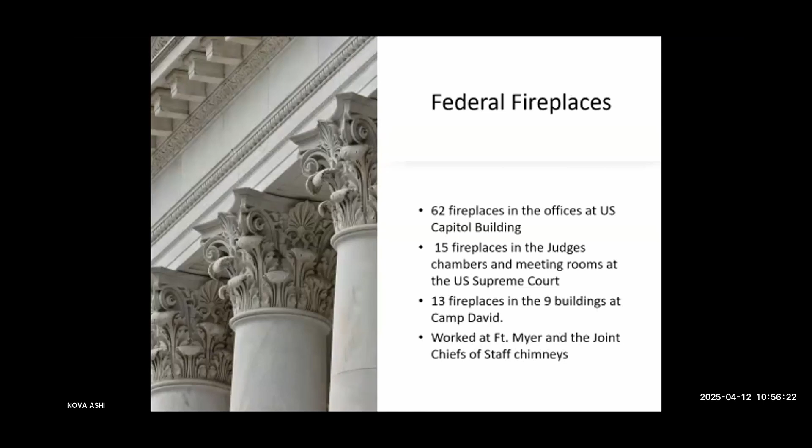So one of the things they wanted me to talk about is fire science. Fire is the rapid oxidation process or chemical reaction involving fuel, oxygen, and heat, known as the fire triangle. If you're from the fire service, you probably talk about the tetrahedron, but this is what I learned. The reaction releases heat and light, with flames being the most visible manifestation of combustion.

Fuel, any substance that can burn, like wood, gasoline, or paper. The oxidizing agent typically found in the air that reacts with the fuel. And then the energy required to raise the fuel to the ignition temperature, the point at which combustion starts.

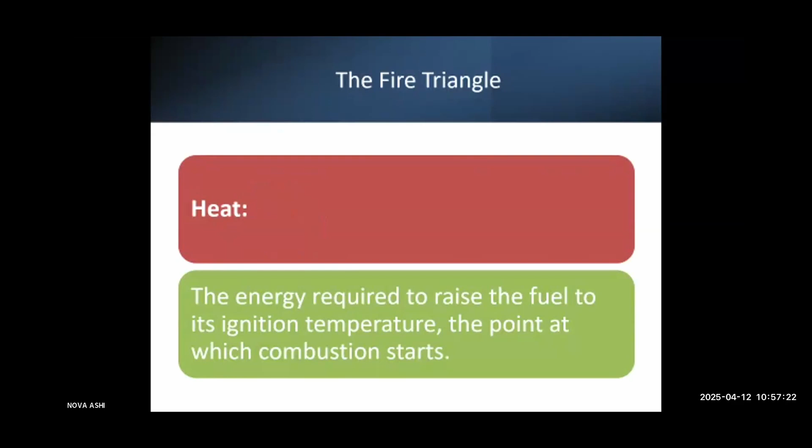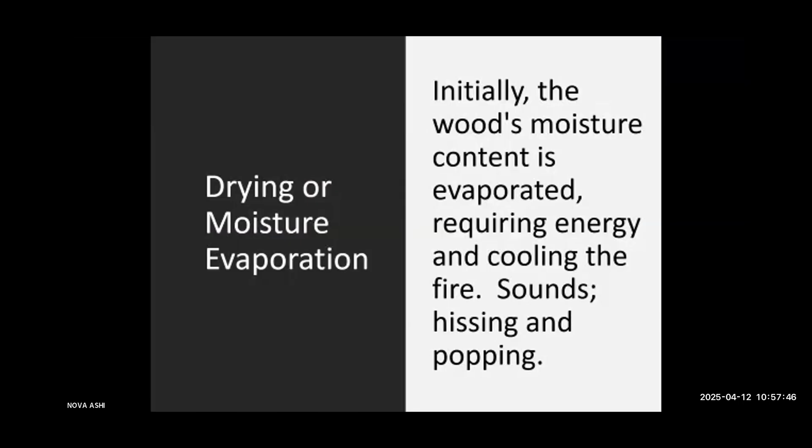Let's talk about the 3 stages of wood combustion as it really relates to the wood in someone's house. Drying or moisture evaporation is the first stage. Initially, the wood's moisture content is evaporated, requiring energy and cooling, and the sounds that you'll hear are hissing and popping. This could also be in your fireplace.

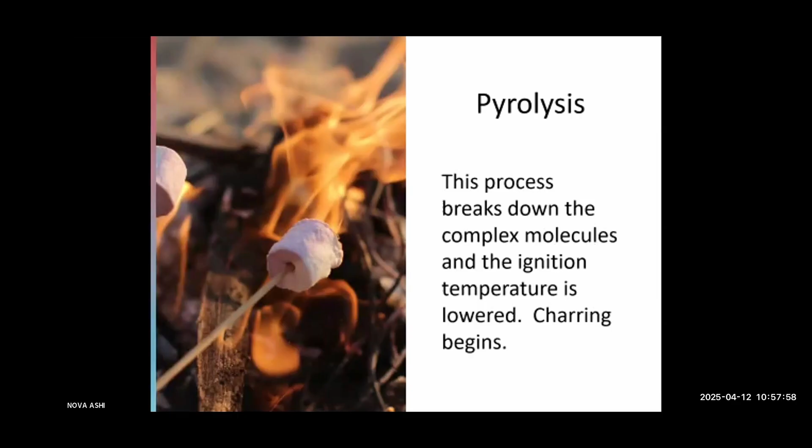Pyrolysis, that's the process that breaks down the complex molecules, and the ignition temperature of the wood is lowered. This is where charring begins. The typical ignition temperature of southern pine, which is what we use commonly in this market, is between 400 and 500 degrees Fahrenheit.

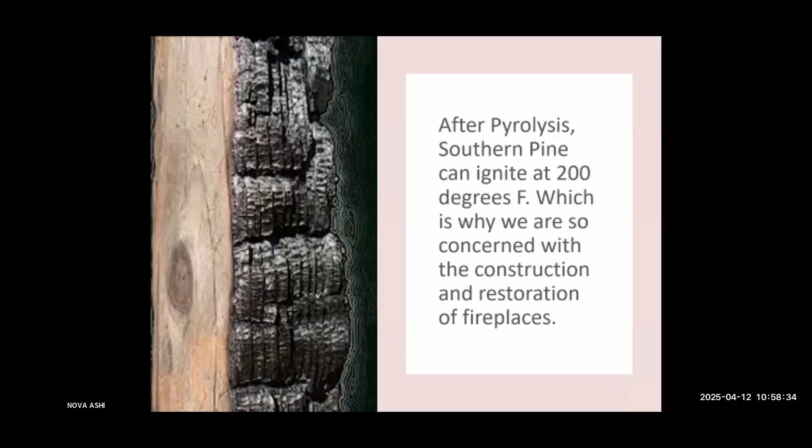After pyrolysis, southern pine can ignite at 200 degrees Fahrenheit. Back when I was a shave tail, they were telling us that it was 150 degrees, and that they had a study done at Warnock Hersey in a lab where they got southern pine to ignite at 150 degrees. That's what we always thought it was, and that's why we're so concerned about fire safety in people's homes as it relates to fireplaces and wood stoves. But I couldn't find that study, so it's gone. Maybe it's never true. All I found is 200 degrees when I looked.

Final stage of combustion, the wood has transformed into charcoal, and the gases are driven from the wood and burned first. Heat production begins here. Then the carbon in the charcoal is burned.

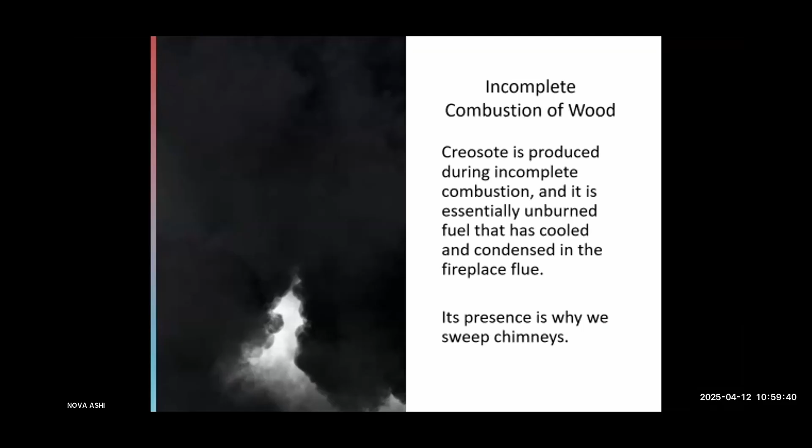Incomplete combustion of wood, creosote is produced during incomplete combustion. You got a wood stove, and you've got that wood stove dialed in, and you go outside and you look for the wood smoke, you don't see any. All you see is the heat signature because you're achieving complete combustion. If you're in an open fireplace, you can't control how much air is coming in and how much air is going out. So you're going to have incomplete combustion, and that's what produces creosote, and that's why we sweep chimneys to get the creosote out.

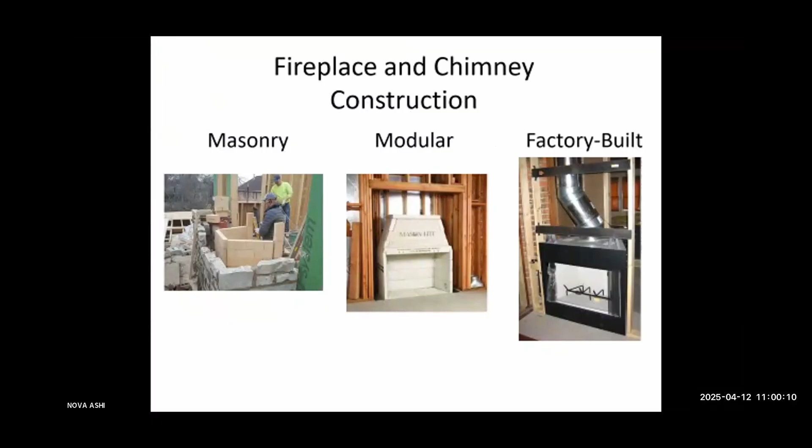Okay, fireplace and chimney construction. We'll talk about masonry, modular, and factory built. We'll just look at the picture. Guy's building a stone fireplace. He's building his firebox there with fire brick. And I don't like the way he's doing his corners. Any of you that are in masonry probably don't like the way he's doing his corners either. Everything should be tied together, but regardless.

Let's talk about the firebox. So the hearth thickness, that's the inner hearth inside the fireplace, and the outer hearth got to be 4 inches thick. Fire brick fireplace walls, 8 inches thick. If you want to use regular brick instead of fire brick, then it's got to be 10 inches thick.

The firebox is supposed to be 20 inches deep, although you see them all over the place, 16 inches deep, and sometimes in DC, like 12 or 13 inches deep. And you know, be careful when you see those, might not be real fireplaces, even though it looks like a fireplace.

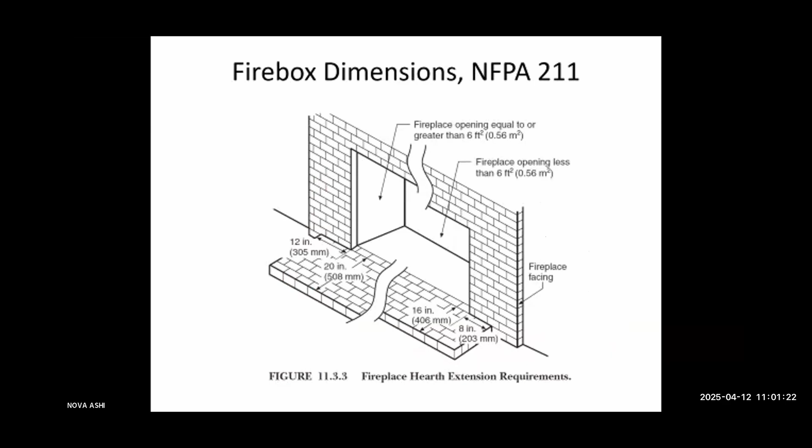If you have a firebox that is equal to or greater than 6 square feet, the outer hearth has to go out 20 inches in front and 12 inches on the sides. If you have a fireplace that is less than 6 square feet, then it's 16 inches in front and 8 inches on either side. That's in the NFPA 211.

Clearance to combustibles: where the trim sticks out on the top part of the fireplace more than 1.5 inches, you've got to be 12 inches above the fireplace before you install any trim. If it's less than 1.5 inches, then it's 6 inches from the top. It's always 6 inches on the sides.

Smoke chamber: total thickness of the front, back, and side wall shall be 8 inches thick, unless you're using fire brick, then it's 6 inches, or unless you're going 6 inches thick with masonry and then 5/8 inch with refractory cement. And then it's got to be parged smooth. One of the great things about parging it smooth: it looks better, protects, and smoke can get up faster.

What is the number one cause of creosote? Residence time. What is causing a lot of problems with us fireplace guys is they are sealing up the houses tighter. People are doing energy audits. Houses are tight, not getting enough air. If it's not getting enough air in, it's just chimney physics. You don't get the air out, and you get more creosote.

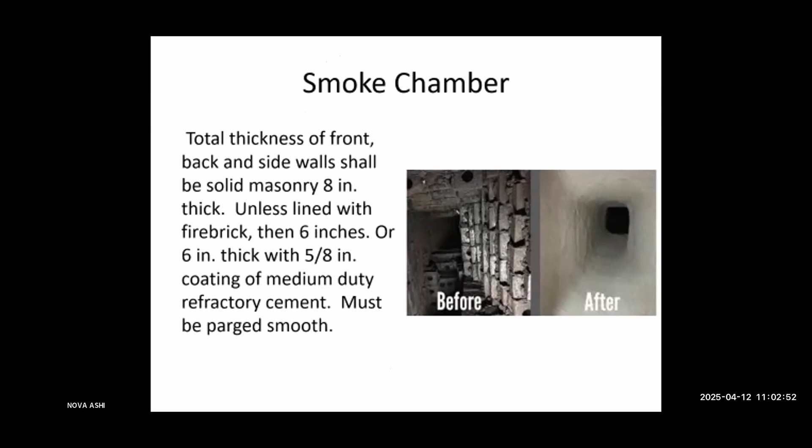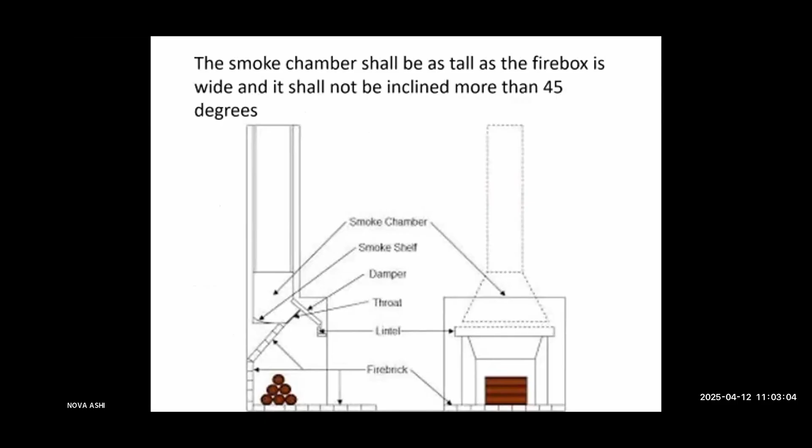The smoke chamber shall be as tall as the firebox is wide, and it shall not incline more than 45 degrees. Masonry chimneys shall be lined. Clay flue lining's got to meet ASTM C315.

Stainless steel's got to meet UL 1777. Then there are other approved methods: cast in place, heat shield when you've got a sleeve inside. Those have to meet corrosion resistance, erosion resistance, temperatures of 1800 degrees - really 1100 degrees intermittent, 1800 degrees once.

Terracotta clay flue tiles are the most common lining system for masonry fireplaces. They must not slope greater than 30 degrees when you're installing them, and they've got to have a mortar joint with refractory cement meeting ASTM C199.

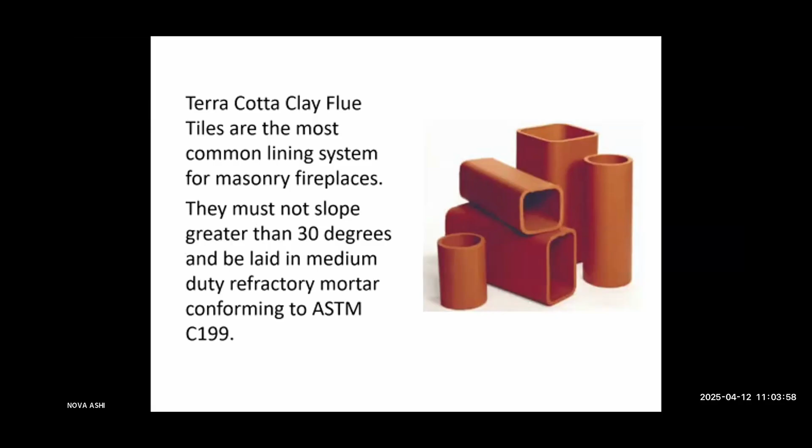If you're going to reline with stainless steel and take the old liners out - which is really the best idea for a fireplace, because you've got to get a big enough liner in - then you're going to install it and use poured insulation around it, following the manufacturer's installation instructions.

In this market, best practice is you don't have to insulate when you're relining a gas furnace, because we're not that cold. You go up north, yes, all the time you have to do it. Is it better to do it every time? Of course. But do we have to do it? No. And guess what, a lot of people don't do it.

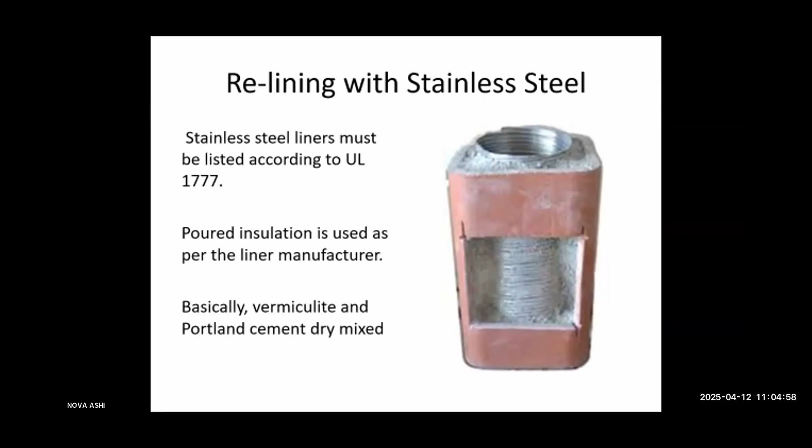Some people say, well, what is that insulation? It's basically vermiculite and Portland cement, dry mixed, in a bag. You pour it into a mixing pan, mix it with water, and then pour that around the liner. And that's what it looks like.

A lot of pre-insulated liners are now in use, and it makes it a lot easier when you're doing wood stoves and some furnaces, if there's enough room.

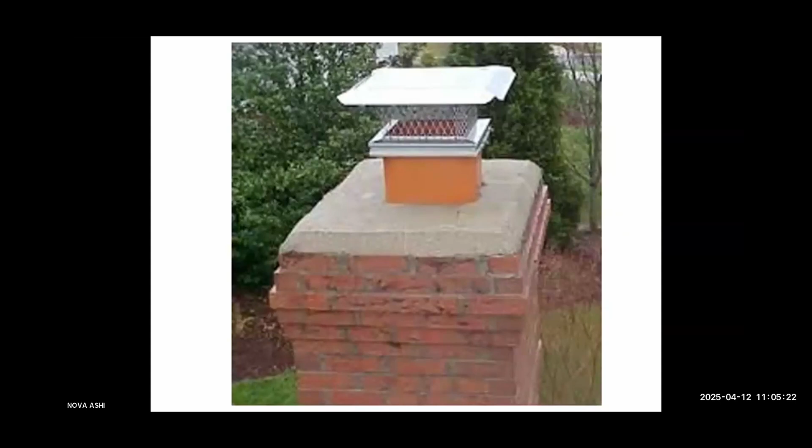Termination of a standard masonry fireplace in the Washington D.C. market. You guys have seen thousands of them from the ground. Usually you're not going up top.

Mason Lite fireplace is a modular fireplace, made out of masonry products. Isokern talks about theirs having Icelandic pumice in it, but it's a lighter weight concrete modular system.

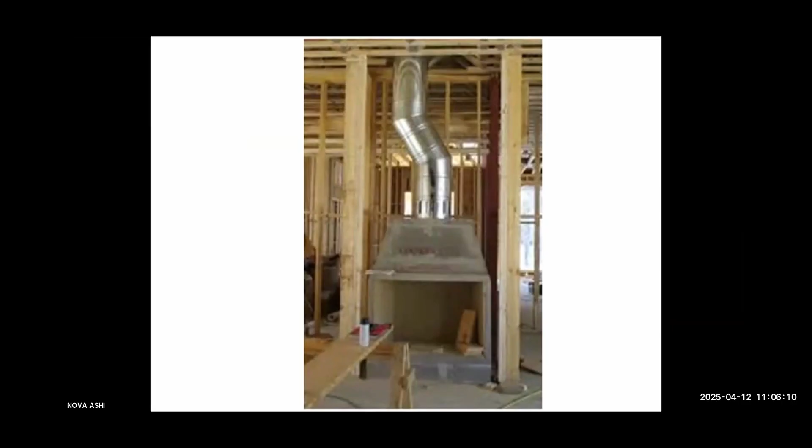I've seen them going straight up with their modular flues, and they all fit together. Most of the time, we attach factory-built fireplace chimney pipes to them. That's going to be air-cooled. For a fireplace that size, the math is pretty simple: it's a 10-to-1 ratio when it's square, 12-to-1 ratio when it's round, but usually they're 12 inches in diameter for something that size.

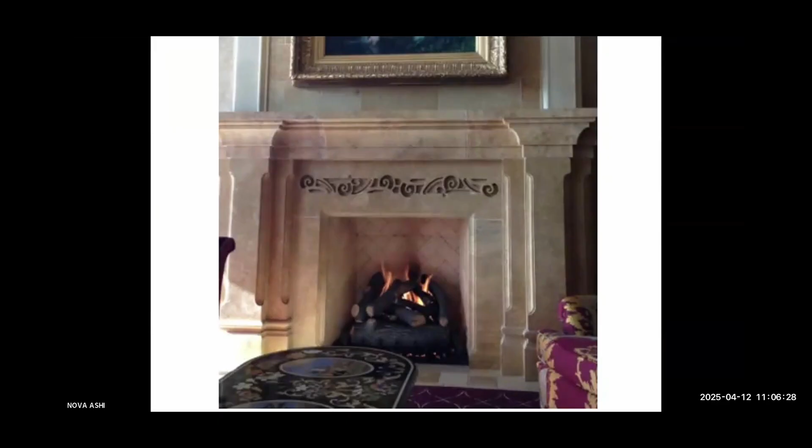You can do all kinds of different things on the interior. Here's the interior of the firebox looking like that. Here's a really badass, high-end fireplace with a beautiful herringbone pattern, gorgeous, and then you've got some old style look there.

Here's a commercial application, but it terminates at the top just like a factory-built fireplace would terminate, because it is a factory-built chimney that we're using. Factory-built fireplaces shall be listed, labeled, and installed in accordance with UL 127, and installed per the manufacturer's installation instructions.

Fairfax County came out a while ago, and the code said 1.5 inches, and they said, well, we want 2 inches. So the Virginia code says that, even though the manufacturer's instructions say 1.5 inches, Fairfax County wanted 2 inches. Well, guess what, we install them at 2 inches. Can't get them passed otherwise.

So let's look back here. This is a smooth face, so it's ready to have your tile installed, your lick-it-and-stick-it stone, whatever. Smooth face units are newer. People like those better because you get a better look of a real masonry fireplace.

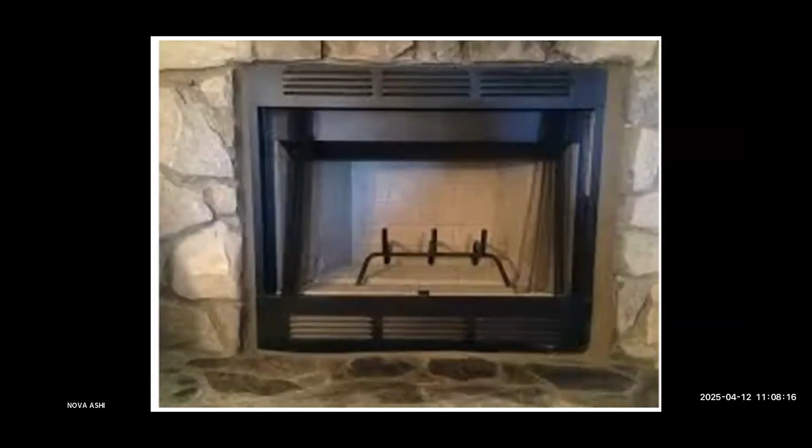But you cannot cover up those louvers. They shall not be covered.

Another high-end fireplace before the venting's installed. Another high-end unit - the interior of that brand looks better than some of the others. And then that's just a standard factory-built unit there. When you roll up on these, you're like, wow, that looks like a masonry fireplace. Then you go in tight and look and say, oh, those are refractory panels.

So, air insulated factory built chimney pipe. It's got a rating of up to 1700 degrees. It's got a galvanized outer piece, usually 12 inches in diameter, and then it's usually 8 inches on the stainless steel inner piece, air cooled.

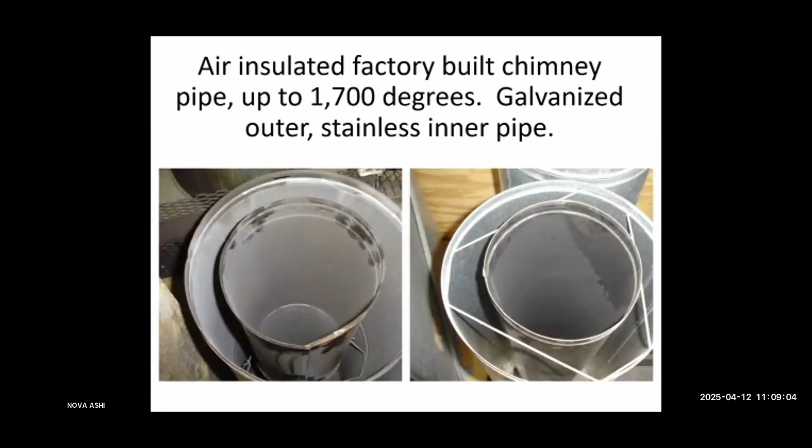Here's what it looks like installed. So we were just taking an old chase cover off that was leaking, putting a new chase cover on, and then we have a look down inside. Want to make sure there's no construction debris on top, make sure there's clearance to combustibles, make sure everything's secured as it should be.

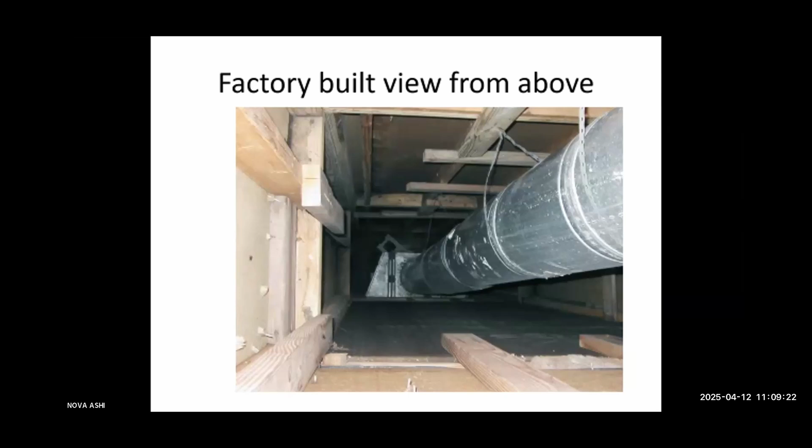And that's the way that it's terminated. You're going to get fooled, though, because sometimes you go into some really upscale neighborhoods where they built brick houses, and they put factory built chimneys on the inside. So you're like, oh, is that a masonry chimney? No, it's not. But they've cheaped out with the fireplace, even though they did the entire house in brick.

Just putting a system together here. You've got a brand new chase cover, and it has a collar. Then you've got a storm collar, and then he's putting the cap back on the air-cooled chimney.

You also have high-end units, so if we're trying to identify some things - you're walking in the house and it's like, what the hell is that? Is that a built-in wood stove? Well, that's essentially what it is. You guys have probably seen them.

We love to install those because the homeowners adore them. People that like wood stoves but have a factory built unit can tear the factory built unit out and invest some money into a high-end zero clearance unit - that's basically a wood stove installed into a stud wall system.

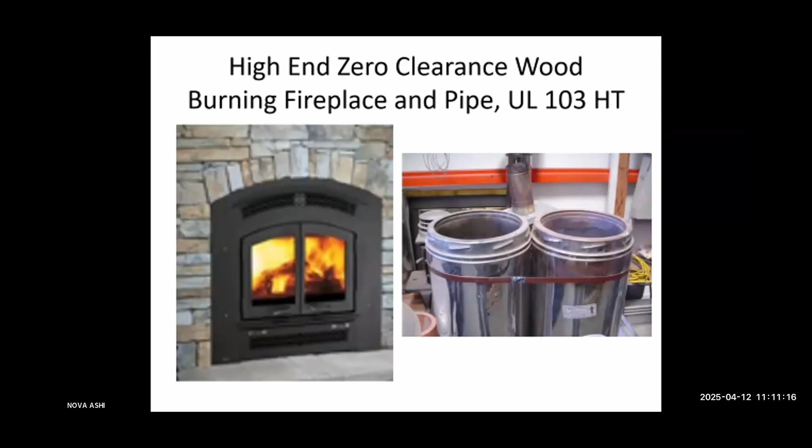So here's the installation. You've got non-combustible studs that must be installed at the top of these things because of the heat. We usually just go ahead and put them all around since we already had to buy them - let's just install those all the way around because those units get super hot.

Now, if you notice on top, it's got 3 holes, and it also has holes down below. The middle hole, that's for the venting. The other holes are for gravity-fed heat to go up into another room or a room upstairs. On some of these units, you can install fans to actually pull the air into the other rooms. You're looking at about 20 grand for an install, but it is badass and it's just wonderful heat.

So those were the wood burning units. There are many other wood burning units and even more gas ones. We don't have time to get into them all today. Most units will take gas log sets - the older ones, not so much, but most all new systems do, though not everything. So check the manufacturer's installation instructions.

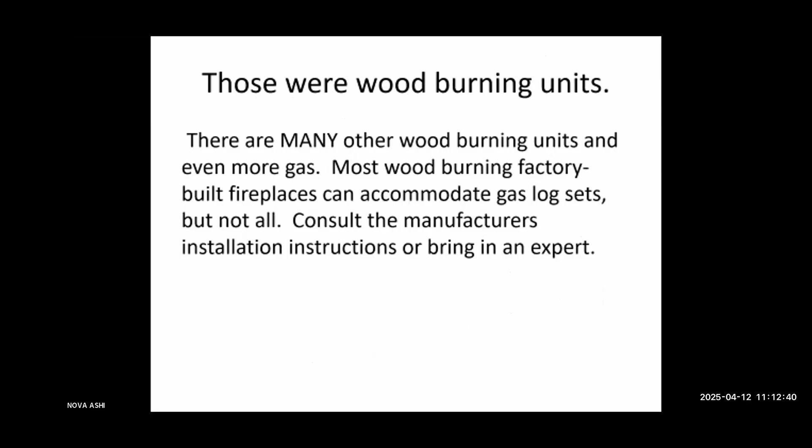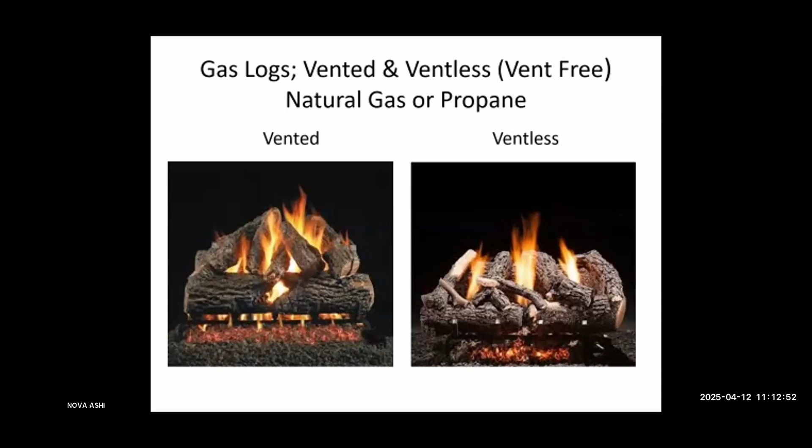That is the most realistic picture of what vent-free really looks like. They've gotten way better, but they're not going to be big flames.

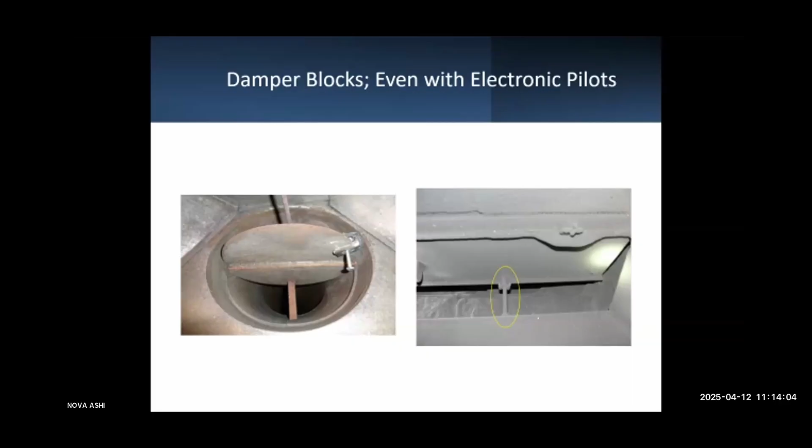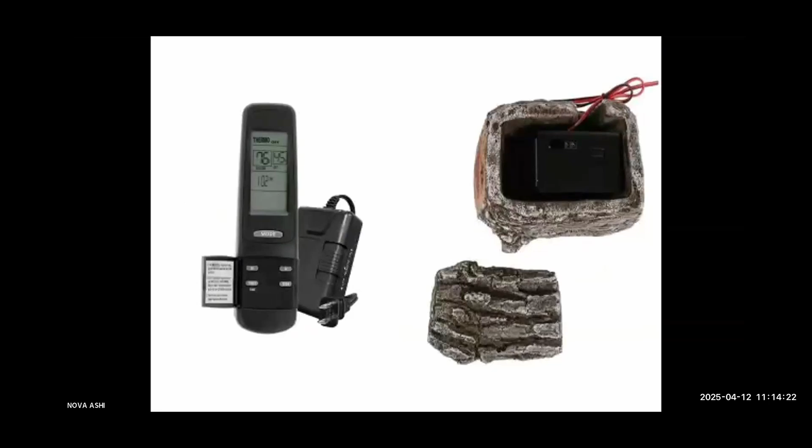The new gas log sets are all coming with remote controls because, hey, the guys like remote controls. Click, click, click up with the flame, click, click, click down with the flame. And if we're going to have those, then we need a receiver that goes into the firebox. That's the thing on your right-hand side here. Come on, let me see that right there. Now, those are going to melt unless you protect them. So as an installer, we put them inside the little fake log sets.

I think it's a great way of teaching kids not to touch hot things. You should have seen what we did with the wood stove in my house when I was teaching my son. He was screaming and crying, but I got his hand within a couple inches, and his mom was trying to pull away from me. But that kid never touched that wood stove after that. You figured out it was hot.

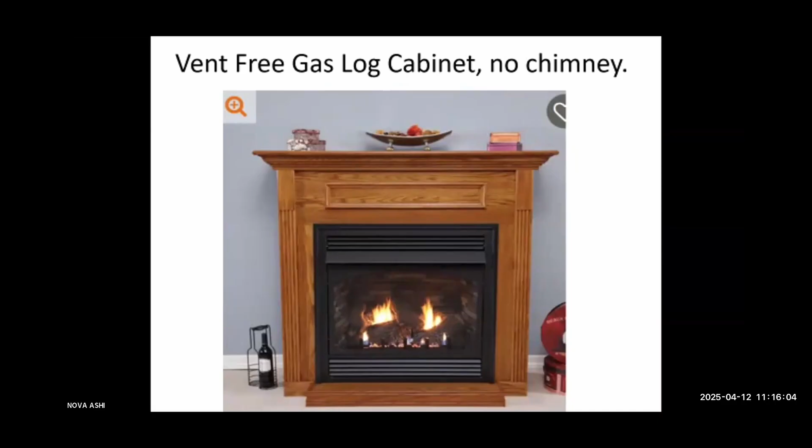So vented gas logs vent up the chimney and out into the atmosphere. Vent-free logs vent directly into the room. Well, it's a good thing because you do get more heat that way, that's for sure. But both can be installed into masonry or factory-built fireplaces. Both can be natural or propane gas, but vent-free has a very unpleasant odor.

We, as a company, will not install vent-free into someone's home unless we're replacing a vent-free system. And even then we're like, these things stink. I know, we've got one already. My wife loves it. Fine, we'll do it. But we put them in and it has been in writing that these produce a bad smell, and all of a sudden the wife says, I don't like that. Well, you signed the paper that you liked it. Everything was fine. And then we got to take it out. And that's what you do.

So it's got an unpleasant odor, and then you've got to meet the air volume rules. It's going to be in the manufacturer's installation instructions, and you need to do your calculations. Best way to tell the type of unit is to look at the tag, it's attached to it in the back, at least it should be. And that one doesn't say anything about it being ventless. So if it doesn't say ventless, it must be vented.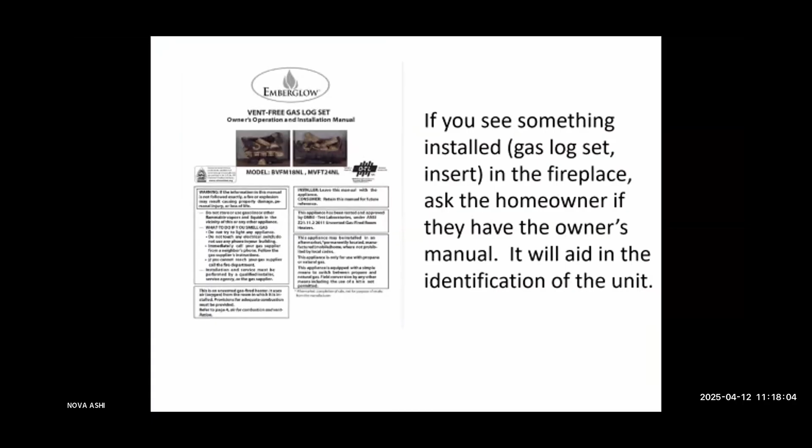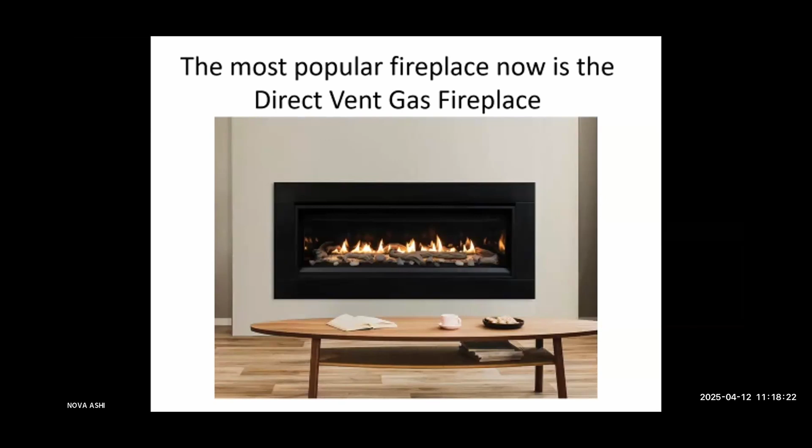Standard looking unit in my house. How does it work? You've got a pipe - the venting is a pipe within a pipe. Outer pipe is 8 inches in diameter, inside approximately 5 inches. This is a top venting kit that goes out. So air comes in around the 5-inch pipe, goes down, aids in combustion. Then exhaust goes up inside the 5-inch pipe and out.

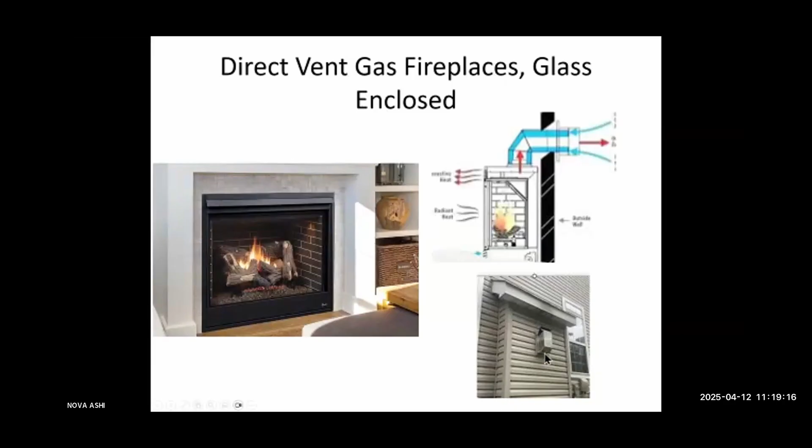If you look at the picture down here, we call that a doghouse. It's got a side venting termination cap. And here's what the pipe looks like, and there's a cap.

This unit is an insert, meaning it's inserted - the gas insert is inserted into a masonry code-compliant system. So you've got a wood burning fireplace downstairs, you replaced all your windows, and now your fireplace doesn't draw anymore and smokes back into the house. But that's kind of your room down there, and you want some heat. Best thing to do is put a gas insert down there, and the venting is slightly different - it's called coaxial venting, a pipe within a pipe, collinear. You can put a gas insert right inside, hook it up, run it up to the top of the masonry chimney, and you're good to go.

These are not to be installed inside of factory built units. And here's what the pieces look like for the insert.

Can you define code compliance? Look in the NFPA 211, that's where all the codes are. It's supposed to be code compliant, meaning it's not supposed to have any breaches or voids.

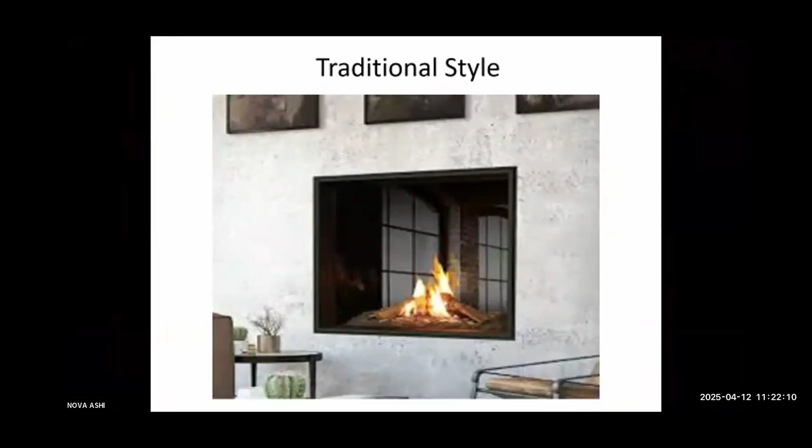But that's what that looks like. Here's another fireplace - another direct vent, traditional style. So you can't reach in, it's all covered with glass, can't touch anything. Direct vent gas fireplaces are designed to bring air in from the outside, not the home, and are sealed with a piece of glass in front or on all sides, which allows the system to meet today's energy requirements. If you're a builder, you want the Energy Star rating - you can't get that with open fireplaces. If you're building spec homes, you're not going to do that.

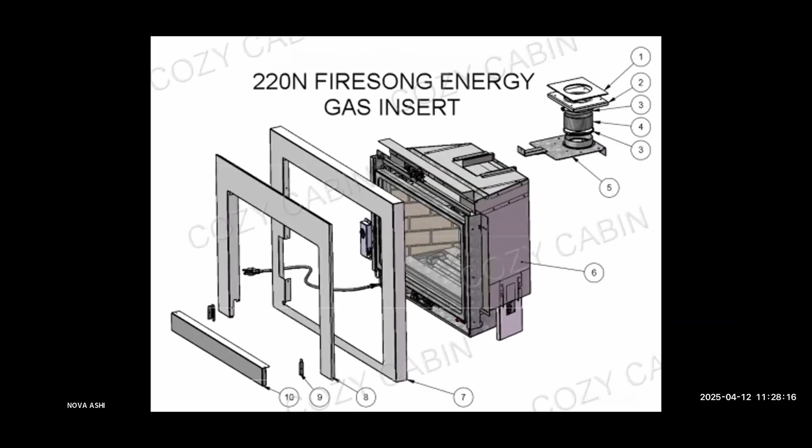This is what it looks like. It's a box within a box, just like a factory-built fireplace is a box within a box. This has panels inside, and instead of being empty with a grate, it has a grate for logs. A lot of these units have blowers, so you need to plug it in. Then you've got a surround and a trim piece. This is what they look like.

One thing you'll notice when looking at a unit like this is you might ask, is that a direct vent gas fireplace? Well, yes, but is it an insert? If you check around the house and see a chimney, it's probably venting there. The other thing to look at is the outer hearth—if there's an outer hearth, that's probably a gas insert. If it's a wood floor, it's probably a direct vent gas fireplace, because direct vent gas fireplaces don't need hearths.

When you come into someone's house and don't know what it is, just ask for the owner's manual, or look underneath and sometimes find information on a tag down there. Also remember, with these factory-built fireplaces, direct vent gas fireplaces, if you're poking around and want to take that glass off, be super careful. That glass is the single most expensive part of the entire gas fireplace—between $650 and $700 for a piece of that glass.

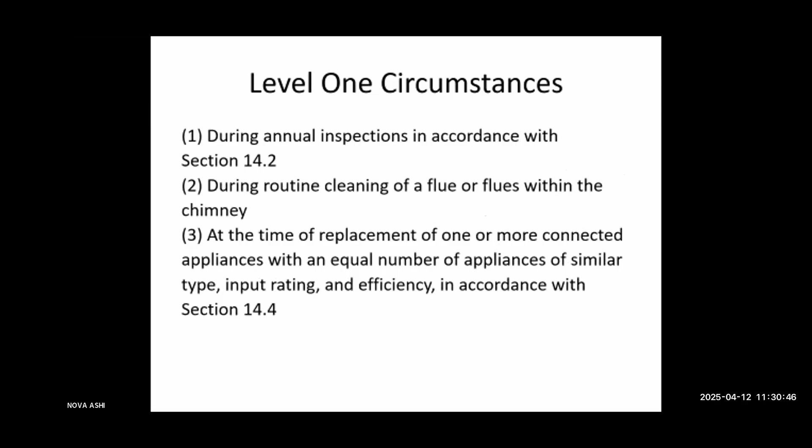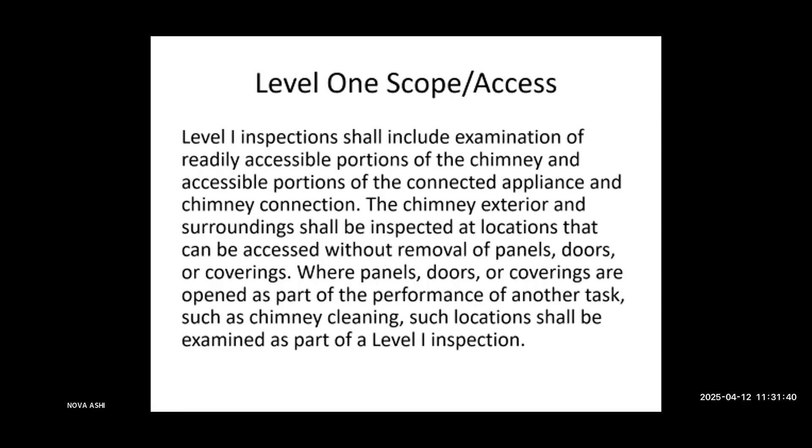Where there are panels, doors, or coverings that are opened as part of performing another task, such as the chimney cleaning, those locations can be examined as part of a level 1. Readily accessible areas of the chimney flue that can be observed through existing openings—like a thimble, clean out, or flue termination at the top—shall be examined for the presence of a continuous flue, proper installation, and no damage.

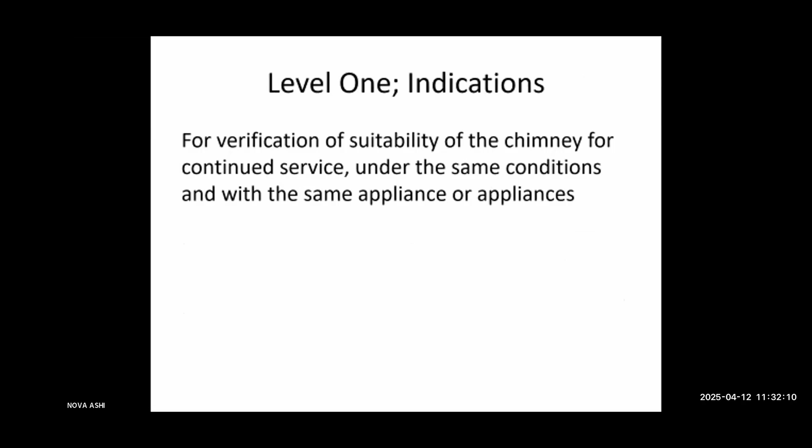A level 1, again, is verification of suitability of the chimney for continued service with the same appliance, or very similar. Level 2 includes all the same things as a level 1—same accessible portions, same enclosed flues—but we're going to look inside the flues, check proper clearance from combustibles in accessible locations, and the size and suitability of the flues to connected appliances. All accessible portions of the chimney, exterior and interior, including areas...

And here's where you don't go with a level 1: you don't go into the attic, don't have to go into a crawl space, don't have to go into the basement—but you do with a level 2.

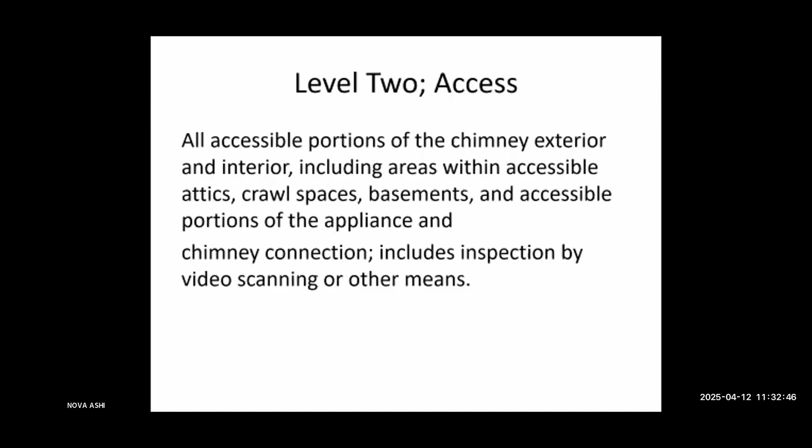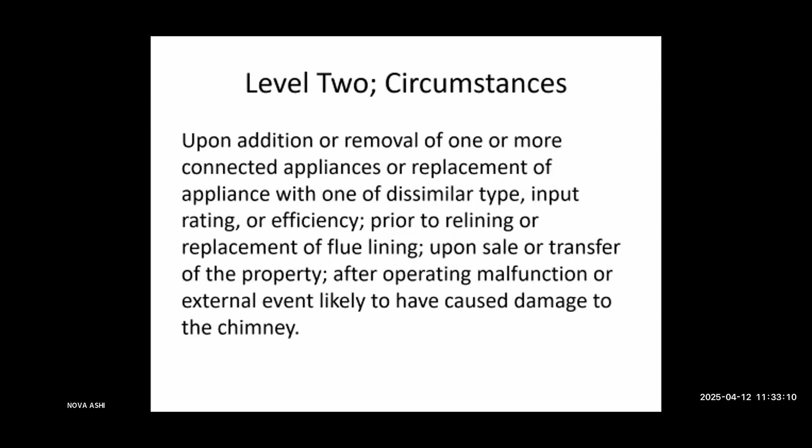Upon addition or removal of one or more appliances, or replacement of an appliance, you've got to do a level 2. So a new appliance with a different input rating, a different efficiency, before we put in a new liner, and upon a sale or transfer of the property—which is all you guys. That indicates verification of suitability of the chimney for new or changed conditions of service. A level 1's inspection is not sufficient for that, and that's why I have to do a level 2.

Level 3 is basically everything in a level 1 and a level 2, but something happened—we smelled smoke where we didn't smell smoke before, the customer believes something happened, there was an earthquake, there was a chimney fire, there was a fire. Now we've got to go in and take down walls, go into ceilings. That's what a level 3 means—you've got to go in there, take stuff down, and look inside.

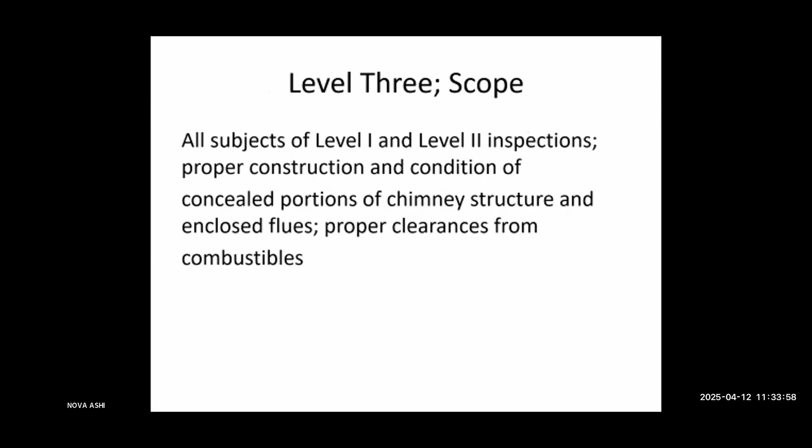We'll get through that even quicker. Inspection process—the inspection process changes depending on what you're inspecting. You guys do more inspecting than we do. Your inspection process changes depending upon some important pieces as far as your business is concerned. With us, a masonry fireplace inspection is going to be different than a factory built, which is going to be different than a wood stove, which is going to be different than a freestanding stove, which is going to be different than a gas fireplace.

Let's start our inspection process of a level 1 masonry fireplace. We're going to go in after we set up our drop cloth, and we're going to look inside the fireplace with a flashlight. We're going to look at all the walls.

We look at all the mortar joints. We're going to look up at the breast of the chimney, then the throat. We're looking for areas that are open, areas that should be parged smooth, anything that's broken. We'll check the smoke chamber and the base of the liner for gaps.

Then we're going to get our tape measure and start measuring. We're going to measure the depth of the firebox, the firebox opening, the clearance, the distance from the damper to the liner, and the clearance to combustibles in the front on the face. We're going to look at all of those areas, and then the outer hearth dimensions.

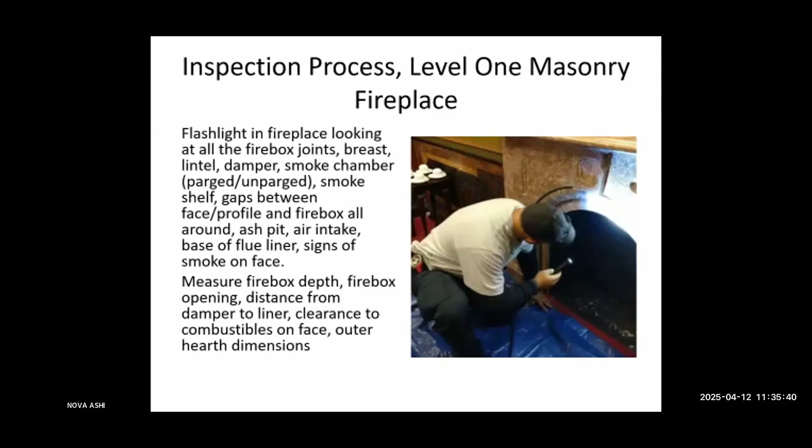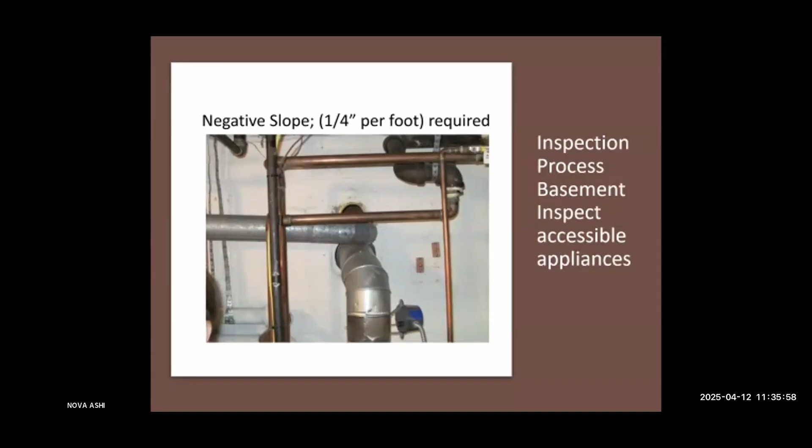Then we're going to go down to the basement and see what's attached down here. If we can, we're going to pull the pipe and look inside that flue. If it's like inside the beltway, they're actually venting boilers and water heaters into chimneys.

And we're also going to be down in the basement. We're going to look up at that outer hearth and see, is there still wood attached there? Because there was wood there when they poured the outer hearth in the base for the fireplace. If there's wood there, what does it look like? Is it charred? What condition is it in? Can we grab it a little bit? Could we take it down? Because we prefer it to be down and not connected. But if we take it down, are we going to bring down the hearth with it? We're going to take a look at those things.

Then we're going to go to the top of the chimney and check everything up there. We're going to look down inside the flue with a flashlight, measure the diameter of the flue, look at the other flues, and measure how close they are to one another. We're going to take a measurement of the crown itself, length times width, and take a look at all those things.

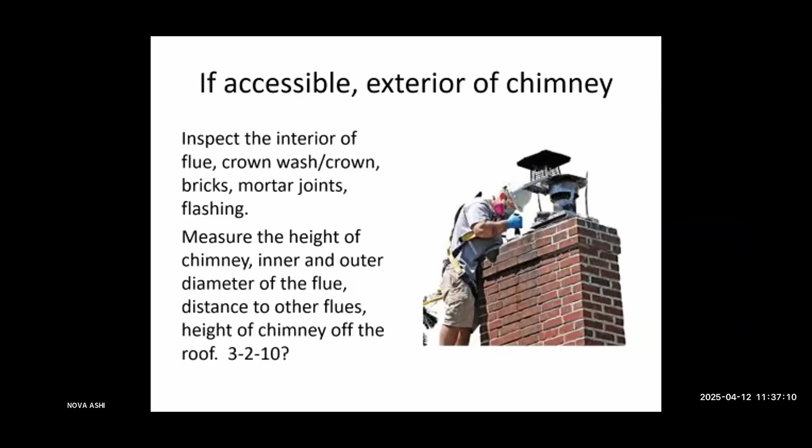And then, how tall is the chimney off the roof? Does it meet 3-2-10: 3 feet above the roof line, 2 feet above anything within 10 feet.

And then if it's a level 2, now I've got to go up into the attic and into a crawl space. Chimneys are going to be either interior chimneys, meaning they're not attached to the envelope of the house, so I'll be able to do a 360 all around it. That's 2 inches clearance to combustible, so where it goes through the roof and near any rafters, it's supposed to be 2 inches away. If it's attached to the house and sticks out, it's attached to the envelope of the house — that's called an exterior chimney — and that's going to be 1 inch clearance to combustible.

And then you're going to go in the crawl space and look for damage. You're going to look for water damage, broken bricks, any problems with anything down there, anything that looks weird.

Just like you, sometimes we're inspectors when we're not going to fix anything — we're going to hand it off to somebody else. And a foundation, just like you, we're going to hand off to somebody else and say, you need to call someone for that. Sometimes we don't fix things; a lot of times there's a lot of things that we don't fix, we hand it off.

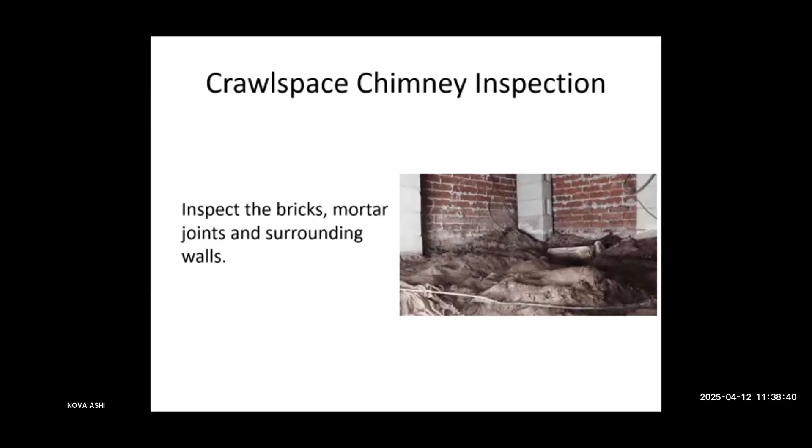So then also for level 2, now we're going to use a video camera or other means necessary to look inside the flue. As part of the level 2, we've got to look inside. We're going to be looking for cracking, flaking, broken, cracked, discolored flues, missing mortar joints. Does the flue change size? Does it change directions? Are there any voids or breaches in between the flue tiles?

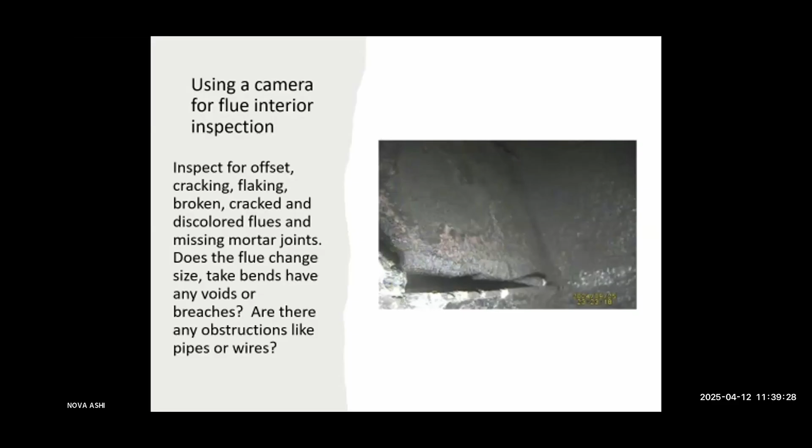Did a plumber install a set of gas logs upstairs and run the pipe right through the furnace flue or the downstairs fireplace flue? All the time they do that. Electricians do funny things too with wires — there's all kinds of wires and pipes through the flues, at the U.S. Capitol building, tons of them. So what are our limitations? Ours are similar to yours, except we usually get on the roof.

But with snow on the roof, wet cedar shakes, wet metal roof, there's no access without a lift because it's too tall, and the damper's too small, we can't get our cameras through there. There's a shroud attached to the top of the chimney that's 8 feet by 3 feet, and we're not going to take it off, so we can't look at the top. Animals, dead animals, insects, all kinds of things. Large amounts of stage 3 creosote mean we can't really see anything, so we're going to want to clean it first, then inspect it.

Recognizing deficiencies and malfunctions. So how much time do I have left? I got 10 minutes, and we got to rock and roll through this. This is the highlight reel.

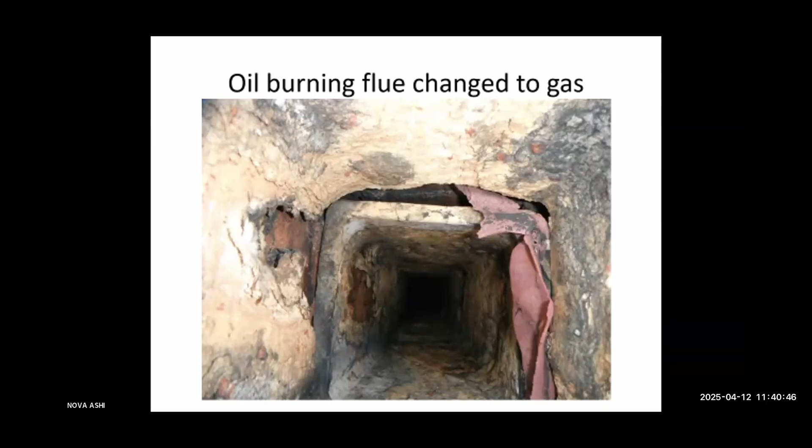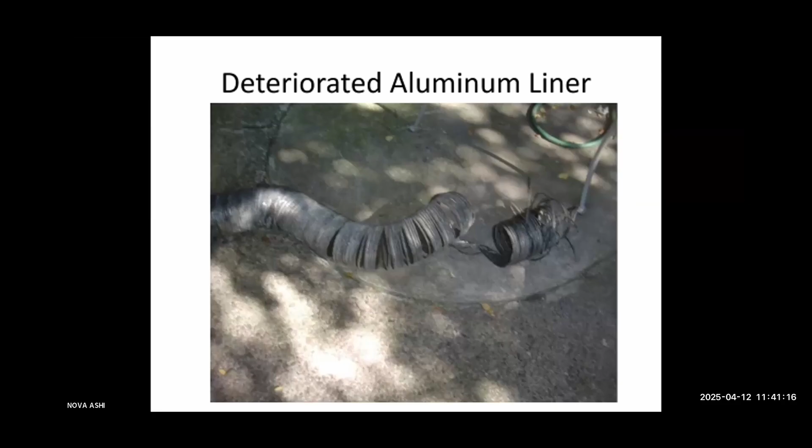Oil burning flue changed to gas. So with oil burning, there's a lot of sulfur in there, and the byproduct of burning natural gas is water vapor, creating a mild sulfuric acid paste that will destroy terracotta clay flues. It'll also destroy aluminum liners. Our brethren in HVAC install flue liners for their boilers and furnaces, and they love aluminum. We hate aluminum because it's trash. It's $125 for a liner, and you put it inside one of those flues that used to have oil in it, and that's what it looks like after a year.

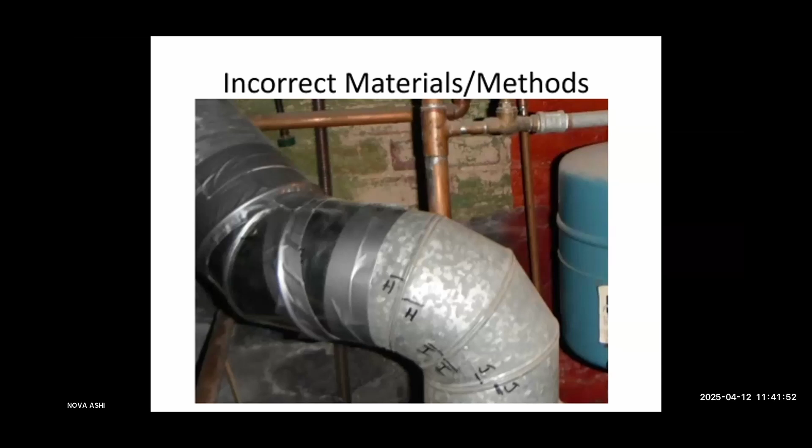Somebody put duct tape on there. Let me ask you a question: are you supposed to see any connector pipes with any sort of tape on them? No, no tape. We got caught, one of our dummies put some tape on it and it failed inspection.

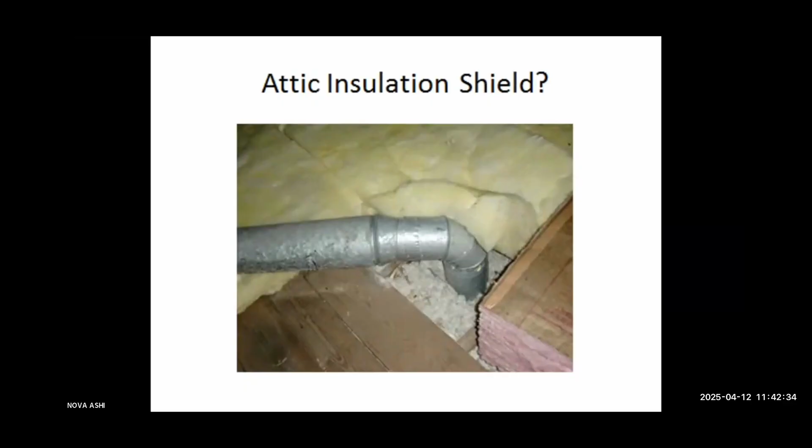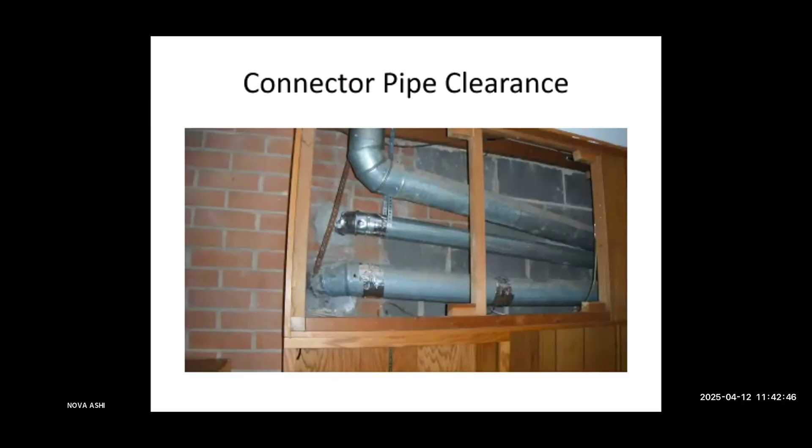Typical down in Arlington. I'm worried about the bottom two, the water heater and the furnace. There's no way those are going to meet the clearance to combustibles. Let's go ahead and look at the numbers. Single wall galvanized gas is going to be 6 inches. Single wall galvanized pipe venting oil, 9 inches. B vent, 1 inch. L vent, which is for oil, that's 3 inches. And the new Pellet Vent Pro, that's 1 inch clearance to combustibles.

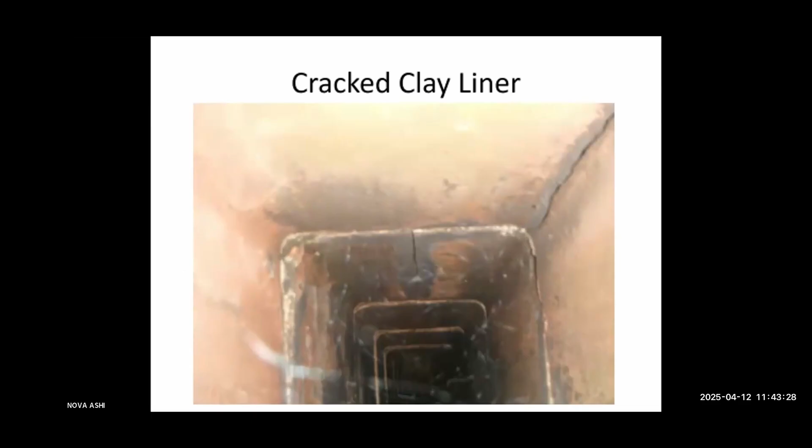Interior of the flues. This is actually a furnace flue, and it's got cracked clay flue liners. How did that happen? I don't know. An event occurred, I wasn't there, I didn't see it. There's no evidence, no honeycombing, no chimney fire. They don't have any honeycombed creosote. Something happened. I don't know, I wasn't there.

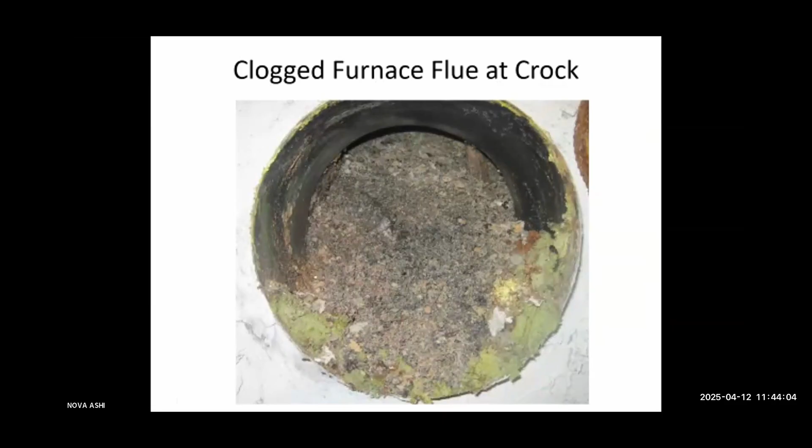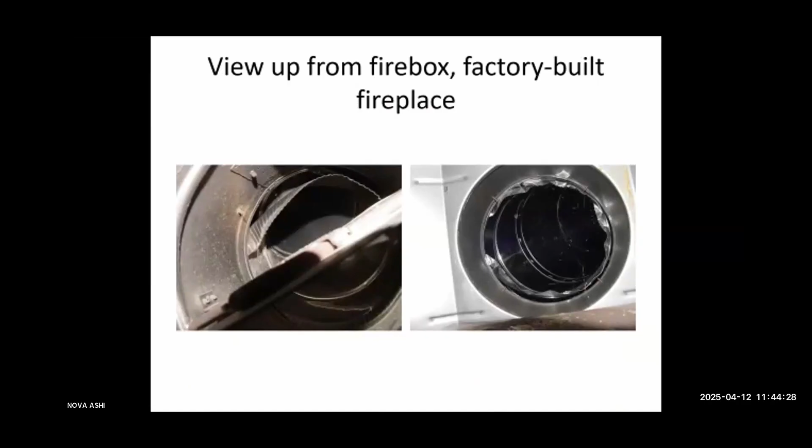Here, oops, they continued to use that one long after. I think that was a couple years after the earthquake, and it jumbled it loose. Find a beer bottle nearby? Oh, quite possibly, quite possibly.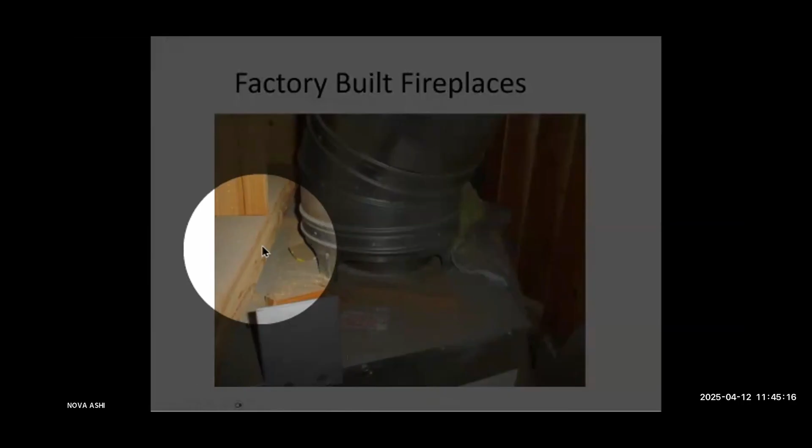And here, look at this gem. Thank God they never used it, because somebody redid a restoration job on this basement and installed this unit, and they left all the construction debris on top. They also left this standoff right here, they moved it. It should be underneath here to protect that wood from touching the fireplace. They removed it with the screws and just put it over there. And maybe the inspector won't see it.

Video inspections inside factory built. The one on the left looks great. The one on the right, something happened. Either that's improper installation or something else happened.

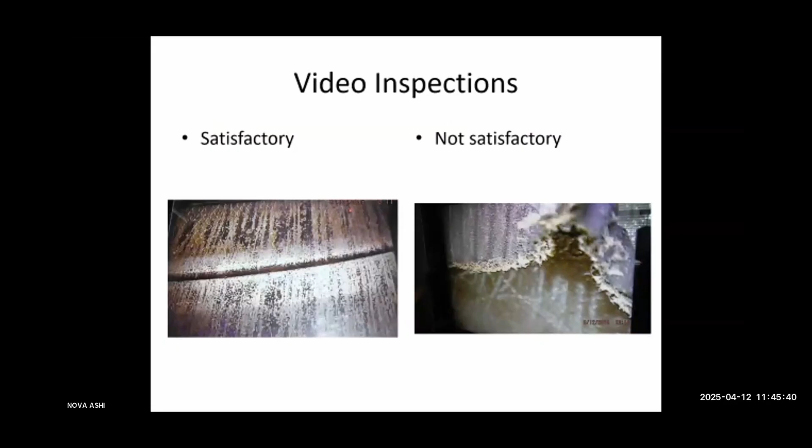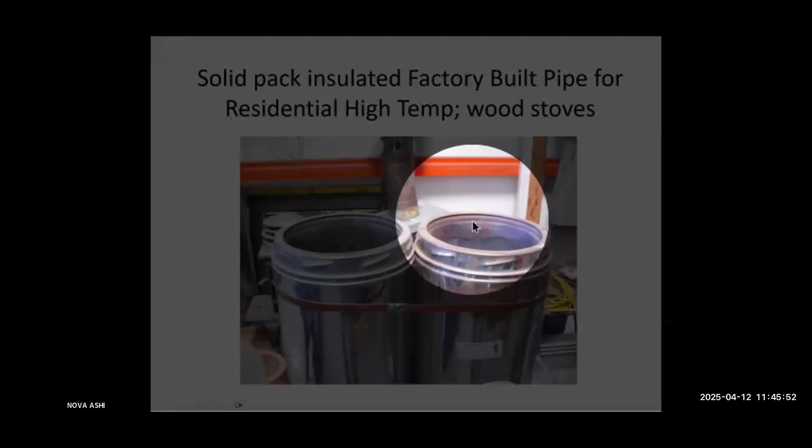Here's the solid pack insulation, the HT high temperature pipes that we saw before. Look at the colors right here. It looks purple, it looks brown. What is that? Well, that was for a wood stove unit.

That's called intergranular corrosion. So there was a chimney fire here. We had the evidence, we had the creosote, and then we had the fact that the fire department was there. So we had the evidence. We know there was a chimney fire.

So we called it a chimney fire, and the chimney fire was contained for the most part. There still was damage inside this pipe, and it reaches over 3,000 degrees, and it changes the chemical composition of the stainless steel, and it turns it purple brown. And it's now misshapen and falling apart. But for the most part, it did its job.

Refractory panels, you see them all the time. What do they do? There's little cracks in there. Hairline cracks are fine, nothing wrong with a hairline crack. Doesn't do a damn thing. There's nothing wrong with it.

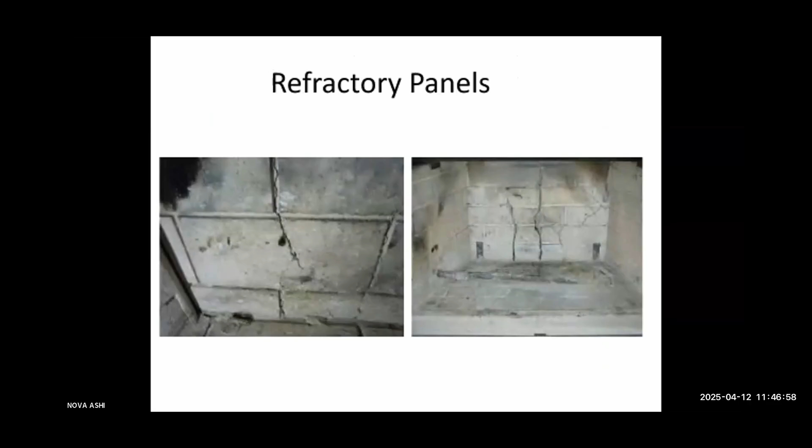But manufacturers themselves can't agree on how big of a crack is acceptable. So some say a dime, some say a quarter, some say a nickel, some say a penny. We say a coin - if you can fit a coin in there, you probably should replace it. Pretty simple.

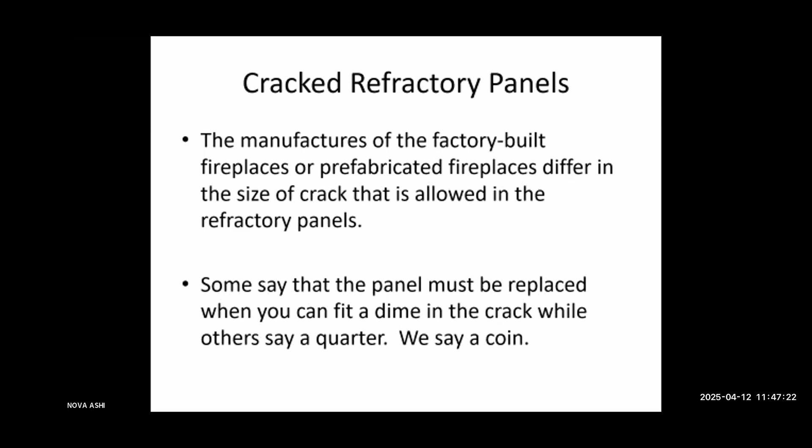Normal, it's hard to see that. It's normal, we got natural gas, ventless log set there. Pretty normal operation. Then we changed it out.

We were doing a test. Then we changed it out, and instead of it being natural gas, we hooked up propane to it. And some of you that know about gas fittings say they wouldn't be able to attach it. Well, some people are crazy and will say that the engineers who designed it are stupid, and they'll say, well, I can change it, it should be this. Well, we did that, and we changed the fittings. And then instead of it being 35,000 BTUs, it was about 160.

Yeah, so that's a problem. That's a problem. If that was at our house, or it was our hunting cabin, that'd be fucking awesome. That'd be great, we'd love it.

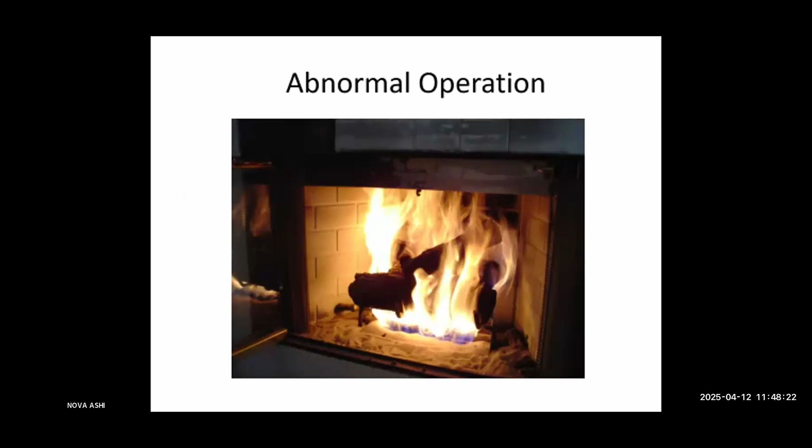Looking up inside the damper, I see a flue next to me. Does that flue go down to the basement? It's either a furnace flue or another fireplace flue.

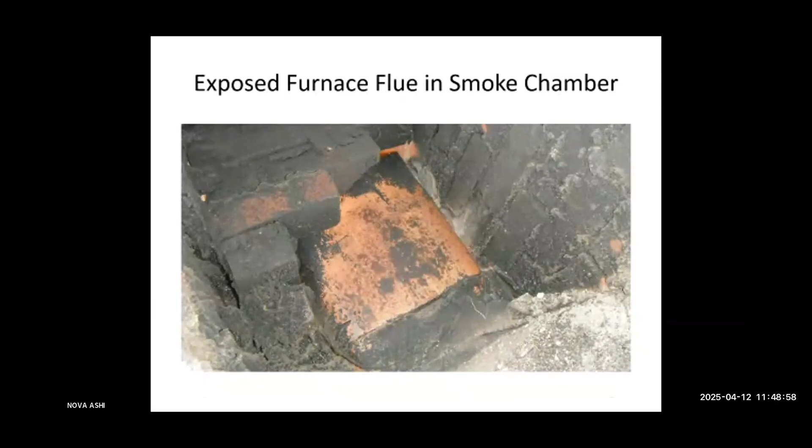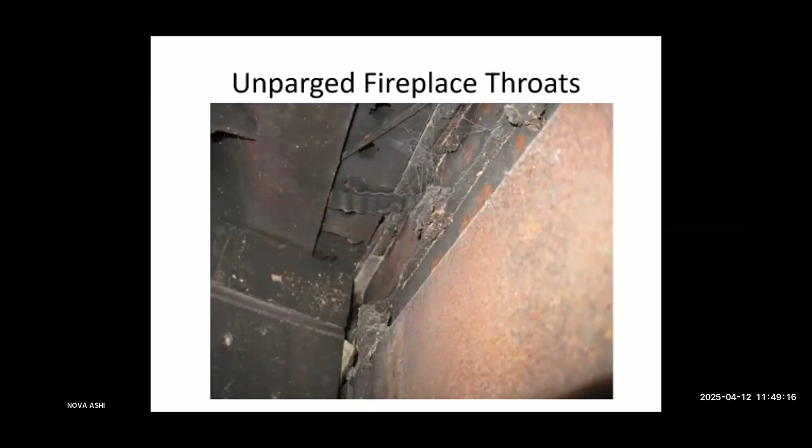That's a problem, things falling apart inside the smoke chamber. That's the breast area, that's the lintel right there. So I go to look in and I look right up - all kinds of nooks and crannies in there where smoke and heat and sparks should not be going.

Somebody installed a new liner. They stuffed it with some foil face wrap, but they never parged it smooth. They never finished the job, probably because it was this tiny smoke chamber and they didn't want to take the damper out and take the rear wall down. They didn't want to do the work.

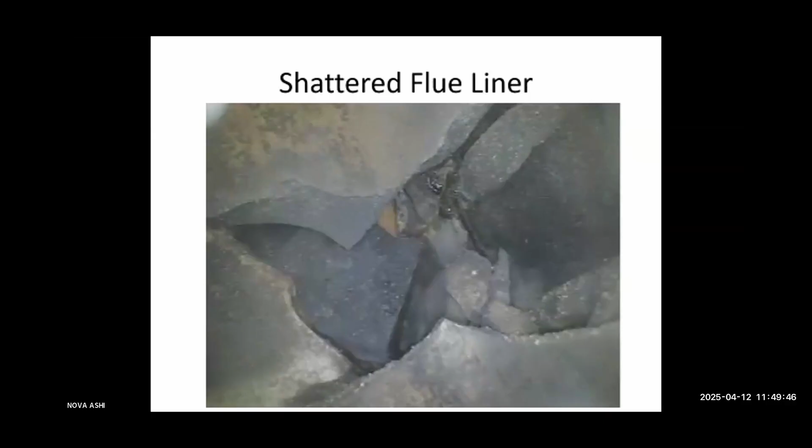This was after a chimney fire and you got shattered terracotta clay. This is a look from a different fire and it had cavitated the entire system.

We already talked about 2 inches for interior chimneys, 1 inch for exterior clearance to combustibles. Nope, I'm going to say that I don't have my clearance there, but looks like I got my clearance there.

Masonry, exterior, you guys aren't doing a lot of that. Higher BTUs are always supposed to go in the bottom. Someone did an install, they put the higher BTU on the top because the water heater is going to be smaller.

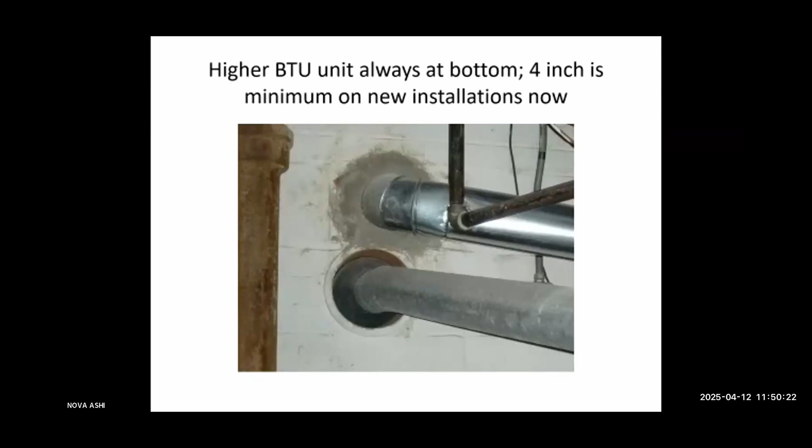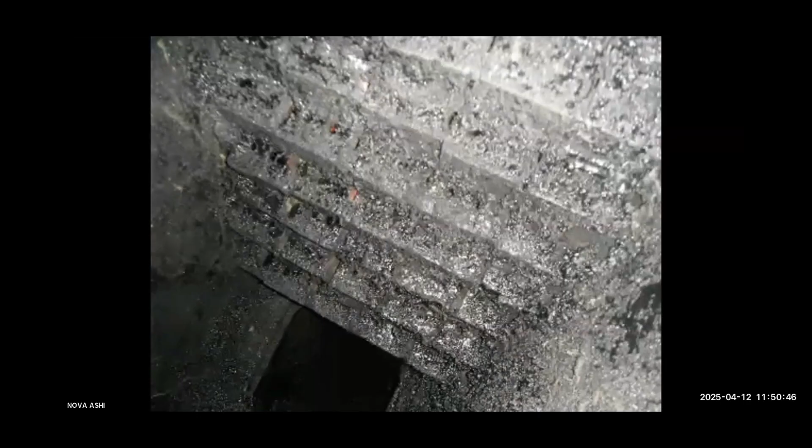That's an old slammer wood stove. Took the wood stove out. It wasn't vented in, wasn't vented into anything, wasn't vented into a pipe - taking it just up to the bottom of the flue tile. It wasn't taken all the way to the top, and it just created large amounts of third stage creosote. That's the fireplace that I told you is not a fireplace.

And this one, did this just happen because someone was in the house and didn't know how to use the fireplace and didn't open the damper? Or is that over years of use? I don't know. I wasn't there, but something's wrong.

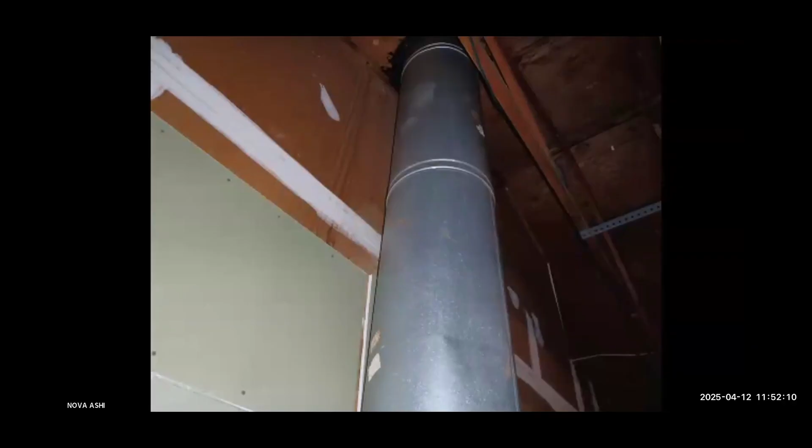This is probably the last one we have time for. This is a guy that installed his own factory-built fireplace in his garage. So that's the ass end of it you're looking at. You can't really tell here, but the pipe is right up against the drywall. And it's got gas cans in his garage.

So I just got some more pictures like that. Do we have any time for any questions? No time for any questions? Oh, I have one. Sure.

On your prefab or manufactured fireplaces, do they have an average service life? Everything has an average service life. And if they're actually using it, it's just like the 67 Mustang in the garage. If it's under a cover and hasn't been used in 30 years, you're probably good to go, you just need to get someone to get it started for you. But if they've been using it, the service life is going to be 20 years, and nothing lasts longer than that now. So we're having a lot of that issue in Loudoun County with gas fireplaces, where they want us to replace the entire guts of the system. And it's like, no, I don't want to do that, I want to replace the entire unit.

Yes sir, ash dumps for wood burning fireplaces. See a lot of them where people don't even know about it. You go down, you open them up and they're packed, and they wonder why they have all this efflorescence or paint won't stick. I'm like, look, it's 30, 40 years worth of ashes down here. I cleaned out one, I knew exactly what cigarettes they smoked. So you've got ashes, and then it's subterranean. Anything that's subterranean, if it's masonry, it's going to be absorbing water.